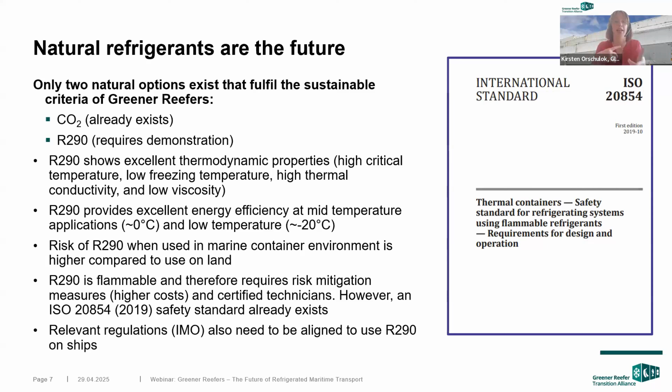There are some risks, as I shared, they are flammable, but they are all regulated, and there are guidelines within this international ISO standard. So it's more about how to apply and how to use the ISO standard to make this reefer even more sustainable and usable.

We as a project have a definition about what is a greener reefer. So I spoke a lot about what is a reefer, but from our point of view, the reefer itself can be more green, more sustainable when it covers not only the refrigerant itself.

We are developing a prototype which is running with propane, a natural refrigerant, which is also available and kind of cheap in comparison to other refrigerants. But also the box itself, so the insulation materials, needs to follow certain guidelines from our point of view, so that the production covers environmental aspects, for example, but also that there is the chance to recycle the box, because current boxes, due to the foam used for insulation, are almost impossible to recycle in a very sustainable way.

So this is our project definition: to produce a greener reefer, which means the cooling unit, but also the box, which does not contain any F-gases or PFAS.

We had a deep dive into the white paper to also understand the technological aspects of this. This project, which I'm leading, is financed by the German Ministry for the Environment, and we are running until April 2026. It's a small project, and we are also collaborating in the Global South, for example with Costa Rica and South Africa, to make them aware of what it means to have flammable refrigerants in the ports or terminals. But here in this webinar, we are focusing now on the technological part of it, and this is the prototype development, which we covered some aspects of, and we did a lot of research in this white paper.

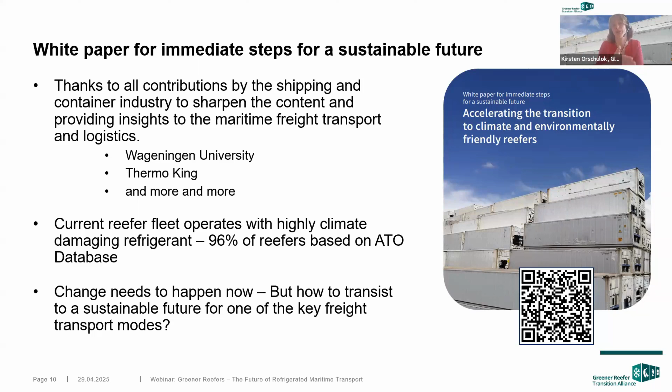But even to avoid these unknown areas, the best would be to move to natural refrigerants which have no climate and no ozone hazard impacts.

So we were lucky in our white paper to have Otto Schacht on board, who is also part now of the Kuehne Climate Center, and he's the former head of the global sea freight section from Kuehne Nagel. He brought in very long experience regarding logistics, maritime freight transport, but also regarding reefers. His assessment was actually that right now, also regarding the political framework I showed, the shipping industry needs to act, needs to go the sustainable way, and there needs to be a common approach, and maybe even bold action is necessary.

As I said, the current new generation of refrigerants are flammable, so there will be a change within the shipping industry. There will be a change for seafarers regarding security measures and regarding trainings.

So the role of reefers, as I shared already a little bit, is that the current fleet mostly has a high global warming potential, and there is leakage of this refrigerant. There is a global annual growth rate of 8%, which means that the amount of reefers running with refrigerants globally around the world is growing. It will not be less. There will be no lesser demand.

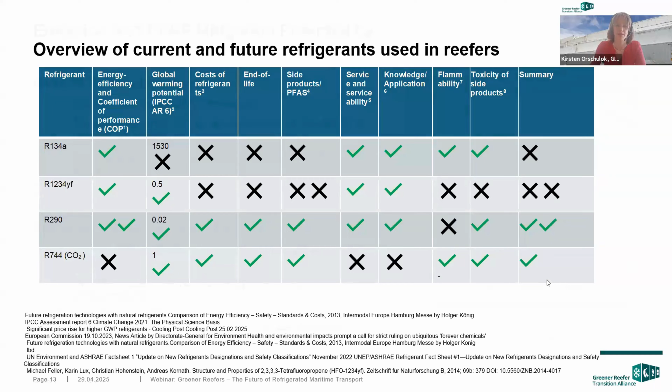So, a snapshot of our results. In our paper we did over 30 different scenarios, thinking about which of the different political setups I shared in the beginning are followed by the different stakeholders - national states, the shipping industry, manufacturers, etc. We tried to cover all of the different options. The time frame was until 2050 - well, aligned with the Paris Agreement, since a lot of states should decarbonize by then.

And we assumed different options regarding the uptake of R1234YF, because we know a lot of manufacturers already have a product in the market, at least one, or others are working on it, since this refrigerant is also used in cars. There's not yet a prototype or product in the market with R290, but we assume it will come. Our database for this was thanks to Wageningen University, who gave us access. So we had a good understanding of the current share of which refrigerant is used when and how, and how many certified reefers by the ATO database are in use, working around this 15 year lifespan, for example.

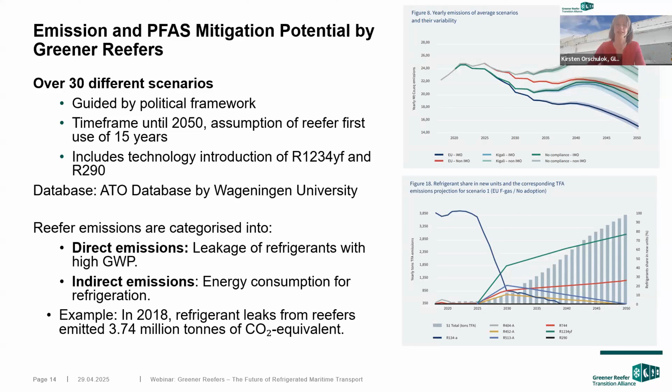The second, on the right side, especially the graph below, is an assumption regarding PFAS. You see the gray pillars, which show the growing of PFAS over the years, especially because the green one is the uptake of R1234YF as refrigerant. The blue one, dropping so heavily, is R134A - the one currently dominating the market - because due to the EU F-gas regulation and other regulations, and its high global warming potential, the industry needs to phase out these containers. But more details you will find in the white paper. And again, thanks to all the contributors.

So we went into different scenario analyses and assumed energy efficiency gains, especially for R290, but also in general, since reefers will improve over the years as manufacturers try to improve their own products. We had a best case scenario where at least 50% of the market would use R290, versus a worst case scenario with non-compliance with some regulations. The difference is actually 171.8 megaton CO2 equivalent by 2050, which is equivalent to 40 coal power plants annually.

So the key mitigation pathways, when it comes to the number crunching, is that the switch to natural refrigerants is a no-brainer, because it has no global warming potential, is not ozone hazardous, has no negative environmental impact, it's aligned with the Paris Agreement and the IMO greenhouse gas reduction targets, and it also prevents TFAs, which we'll learn more about later.

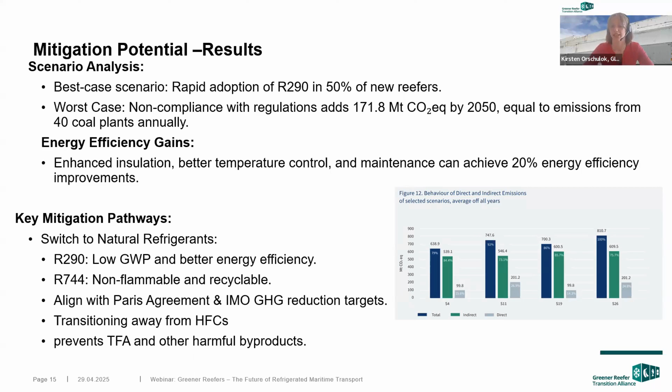So what are the strategies to scaling up R290 adoption? I'll highlight just a few, but in the paper you can have a deep dive into our recommendations. One is the technology, making it possible to have a prototype, which I'm showing in a second, where we demonstrate that R290 is market ready. Then also when it comes to regulatory and policies, we'll learn a bit more from Daniel regarding the discussions at the EU level.

We see also other options. For example, tax benefits would be an option for supporting natural refrigerants.

For market and financing, it's always key that it's better to work slow but as a group in comparison to alone but fast. That's what I learned from my work with colleagues in the African states. It needs a partnership, a common goal, even if it's slow, because then it's more sustainable than having one front runner.

And in our discussion in the last months, we also realized that this discussion about R290, propane as a refrigerant, is not new for a lot of the manufacturers. So we are not alone, but not many are speaking about it.

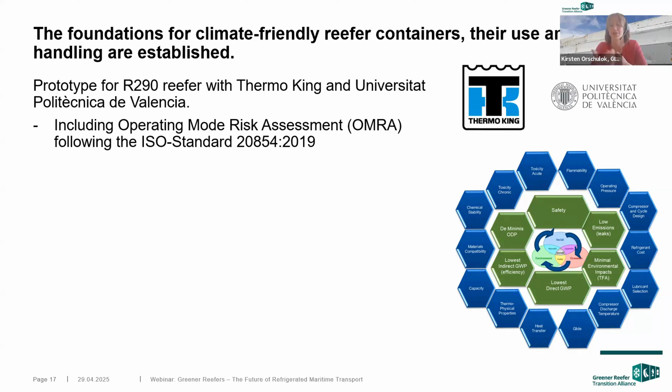This is the step described within the ISO standard to show that the product is safe. It's the common standard. There are always some recommendations on what can be done, but in the end it's about having a product which is safe for handling, for the seafarer, for the captain, and also for the logistic workers in the port.

Parallel, we are working on an eco-label process for Greener Reefers, which includes also energy benchmarking. So what I said regarding energy consumption should be lower - no consumption of energy is already climate protective, but of course a reefer needs some energy, so we try to have it as low as possible.

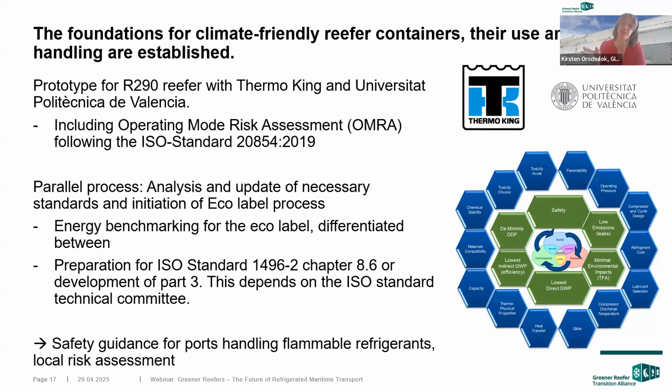And we are also developing a safety guidance for ports for handling flammable refrigerants. I shared this in the beginning. Based on our discussion, this seems to be right now quite a blind spot for a lot of the stakeholders, or maybe it's simply not within their mandate.

So now it gets a little bit technical regarding the reefer itself. As I shared, we're working with Thermo King. We are using their container fresh frozen product as a baseline, to see what the current energy consumption is. The R290 prototype will have 10% less energy consumption.

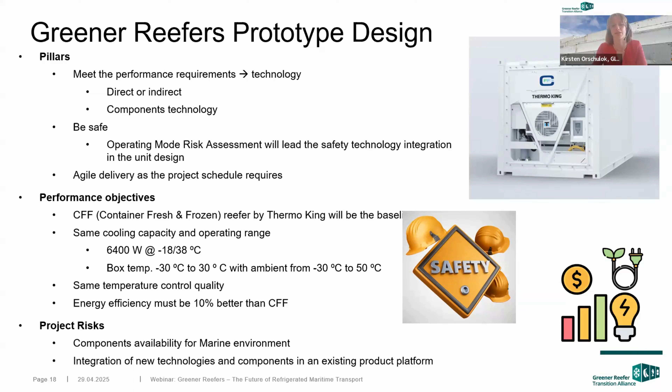We will follow the OMRA process, and we mentioned some risks because it's a prototype development. There are some components, as the maritime environment is very hazardous, also to metal, for example with salty water. We are working to make this prototype as close as possible to being launched on the market, but of course there are risks that some components are not available. In general, we are working quite intensively on this.

So we will launch the prototype into a field test to demonstrate the minus 10% by next year, March, together with the shipping line.

So what is driving the sustainability? It's compliance with international frameworks, especially the IMO decarbonization strategy. It's the EU regulations, some of which have impact on the technology itself, some on the service provision, for example in the harbors, and some on the provision of the refrigerants. If there's a limitation, mostly the price will go up, which is also a point from our point of view regarding R290.

It would be a bad investment to go down a path where you, as the owner of a container, face higher costs because different refrigerants, which are synthetically produced, will be more expensive due to limitations. So this is the commercial aspect.

The other aspect is environmental. There will be regulations coming. We don't know yet in which form, but we will learn more from Daniel. The new generation refrigerants are flammable, so either way there needs to be a safety procedure in place. The best approach is to develop this together between manufacturers, shipping lines, terminals, and seafarer organizations, to have the best product possible.

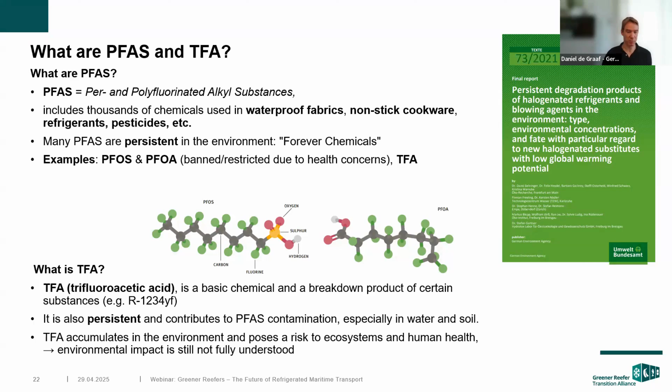Another important candidate of PFAS is TFA. TFA stands for trifluoroacetic acid. It's a basic chemical directly produced for several purposes, but it's also a breakdown product of certain substances, especially refrigerants, such as the HFO refrigerants, namely R1234YF. So this is today, I would say, the main source of TFA in the environment. It's also a persistent compound and adds to the PFAS contamination, especially in water and soil, and as I said, it's a persistent substance, so it accumulates there and poses risks to the ecosystem and to human health.

I didn't mention PFOS and PFOA. They've already been banned because they have health impacts, and there is now a restriction proposal for all the PFAS substances in the EU under the REACH regulation. REACH stands for Registration, Evaluation, Authorisation, Restriction of Chemicals. This proposal has been handed in 2 years ago by 5 member states: Denmark, Netherlands, Norway, Sweden, and Germany. And as I said, it addresses all the PFAS substances because of their toxicity and persistence.

And yeah, the example I've already given as well, it's TFA. And I found in the proposal a certain sentence which I want to read out to you, which puts it very well, puts it in a nutshell why these substances should be restricted. So some scientists argue that the planetary boundaries for PFAS have already been exceeded, and human biomonitoring studies show that the cocktail of PFAS, so the many PFAS that are out there, to which parts of the general population are exposed to through different sources, such as food, drinking water, products, etc., already may result in health risks. So we are already beyond the point where we can accept these substances to accumulate in the environment.

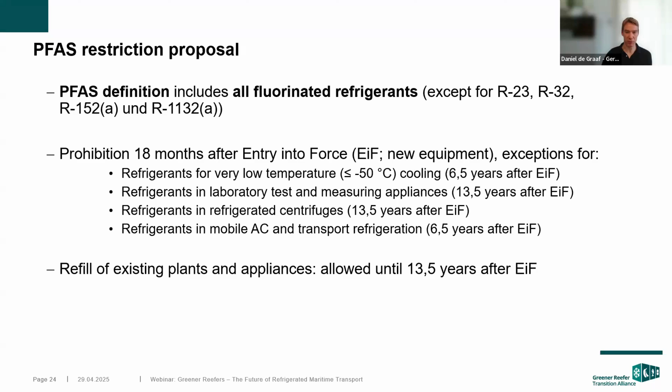So after this proposal comes into force, you have a limit of 6.5 years. We can still put these products on the market. After that, completely forbidden. You still can refill the existing plants and appliances. That's allowed for another 13.5 years after the entry into force.

So having a closer look at PFAS and TFA, you find them globally all over the planet, even in remote areas like the Arctic, and you find them especially in the soil and the water. Since it's persistent, it doesn't go away. It moves into the groundwaters, and with that also into the drinking water. You can find them in sediments. It enters the food chain. You find PFAS and TFA in plants and animals. And since it's in the food chain, it's also in humans, because we eat plants and animals. And therefore, you also find PFAS in humans, in urine, in the blood.

And yeah, I think the most prominent intake route is the drinking water and the food, of course, but mainly the drinking water. And the problem with this is you cannot remove TFA from the water resources. That's not possible. Well, there's one method, it's called reverse osmosis, but it's very energy intensive. You need a lot of energy to run it. It's costly, and you lose 50% of the water you treat. So an enormous problem. This is not applicable to grand scale drinking water preparation.

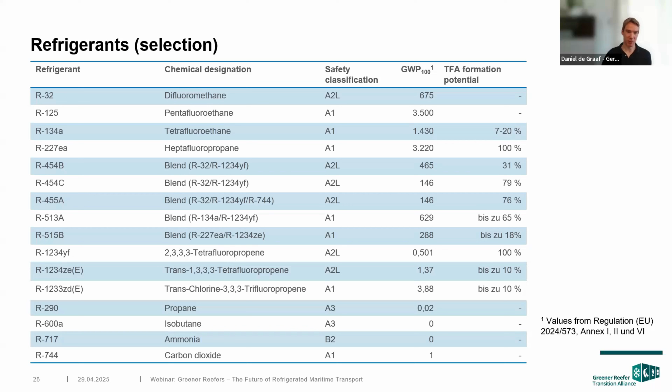So this is R134A. We heard about it before in the talk from Kirsten. 96% of the reefers run on this refrigerant. And here are also the candidates which are discussed or already implemented as an alternative, R1234YF.

This one has a TFA formation potential of 100%. That's here in the column on the very right. This means every molecule of this refrigerant breaks down into one molecule of TFA, 100% yield. I'll show you some graphs later on how this will impact TFA emissions in the environment.

R134A does not have such a high TFA formation potential, but since it's one of the most ubiquitous refrigerants, the total TFA coming from this refrigerant is also quite high. And of course, natural refrigerants have no TFA formation potential, no problem on this side.

We did a study and asked, what are the maximum TFA emissions which will occur in Germany if we use HFO refrigerants more and more? This is already the case in car refrigerants. Kirsten also mentioned that. Close to 100% of cars have air conditioning, and 50% of the cars in Germany, about 48 million, run with R1234YF as the refrigerant.

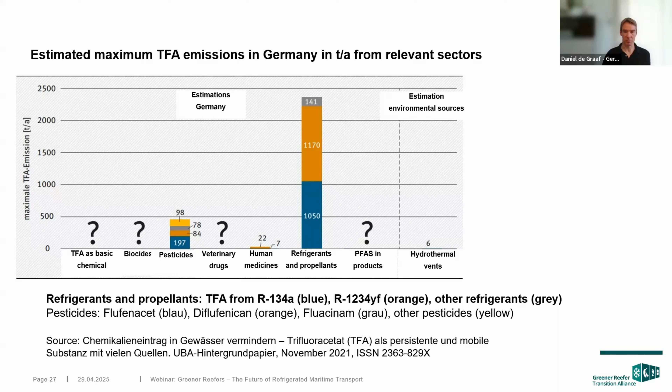TFA persistency doesn't sound too scary, but it turned out in recent years that TFA is not only persistent, but it's also toxic. It's a liver toxicant and a reproductive toxicant. That means if you take up too much TFA into your body, the offspring, your children, can have a problem. This was found out in animal testing. They fed TFA to rabbits, and the offspring, the little bunnies, showed malformation of the eyes. So it's really an issue we should keep an eye on, and that's what authorities are doing.

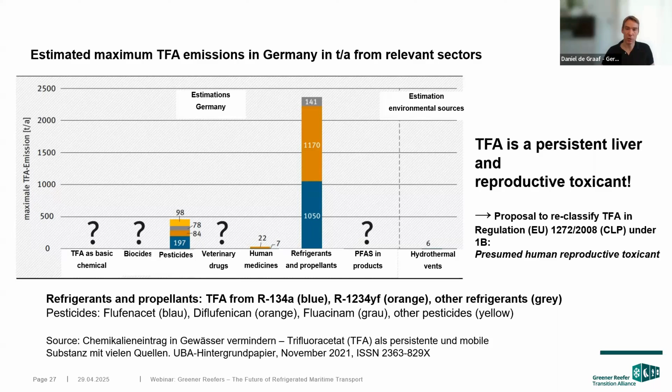So there's a proposal to reclassify TFA in the CLP regulation. CLP stands for Classification, Labeling, and Packaging of Chemicals. They want to newly classify it under 1B, that's presumed human reproductive toxicant.

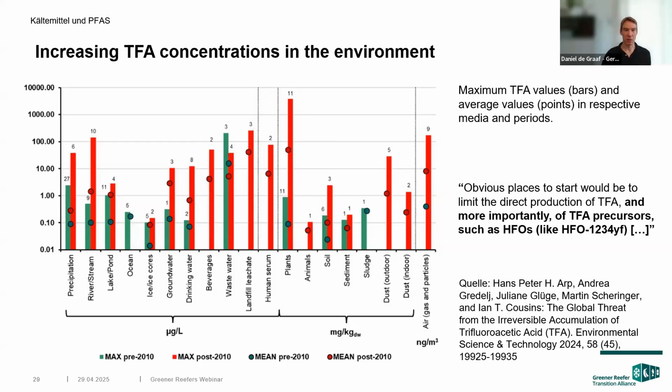There's another quote which I took from this study. The researchers say that there are obvious places to start to get rid of the growing TFA load in the environment, and that's getting rid of direct production, and more importantly, of TFA precursors such as the HFO refrigerants. So they actually appeal to us, to the authorities, to the industry: please try to avoid using HFO refrigerants such as R1234YF.

So just a few more words regarding the restriction proposal. It didn't come into force yet. We had a public consultation in 2023, and now the statements of the ECHA committees are prepared - that's the Risk Assessment Committee and the Socio-Economic Analysis Committee. Upon these statements, the EU will take a decision. It was anticipated for 2025, but now they think, as an internal assumption from the EU Commission, that entry into force will come in 2028, so some years from now.

And what concerns the reefer industry, you add plus 6.5 years, so by 2035 there will be, if the proposal is decided on positively, PFAS restricted in the reefer industry.

You have 2 minutes left, Daniel. Thank you, that's I think 2 slides.

So to sum this up, TFA is a persistent liver and reproductive toxicant which accumulates in the environment, and not only that, also in animals, in plants, in human beings. It's everywhere. Major emission sources, as I told you, are refrigerants and propellants, such as the ones used in the reefer industry, R134A and R1234YF.